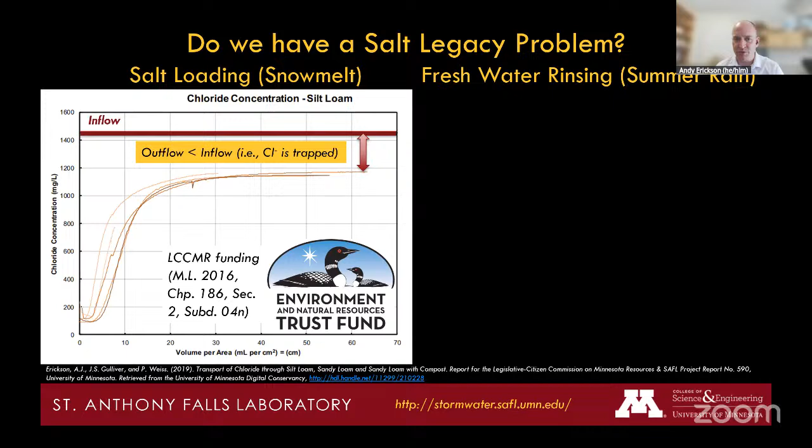What was interesting also is when we go to summer rain, this kind of freshwater rinsing, we don't see all the salt come out either. So these two plots are showing chloride concentrations over time or volume through the column experiments. And what was super interesting is when we loaded it, not all the chloride came out. When we put clean water through it, not all the chloride came out.

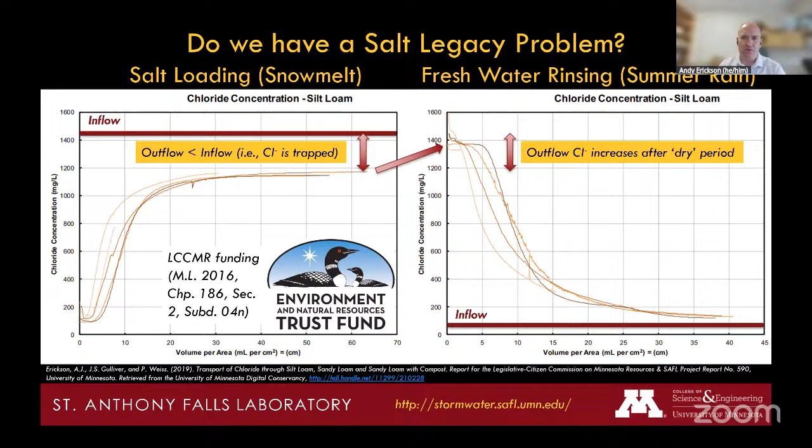So this chloride in the road salt is somehow interacting with the soils and not traveling 100% with the water, which has been the conventional wisdom and understanding of these processes for many years. But as I said, these are laboratory experiments, column experiments.

We also found the chloride is building up in our soils adjacent to real roadways out in the environment. We went out to a highway where we had really good salt application data for a number of years. We collected soil cores. We looked at that data in terms of depth and location, distance from the roadway, et cetera. Again, there's way more detail that you could see beyond this slide. The full report's linked here at the bottom, and I can provide links and even email attachments for all the resources that I'll share today, if you are interested.

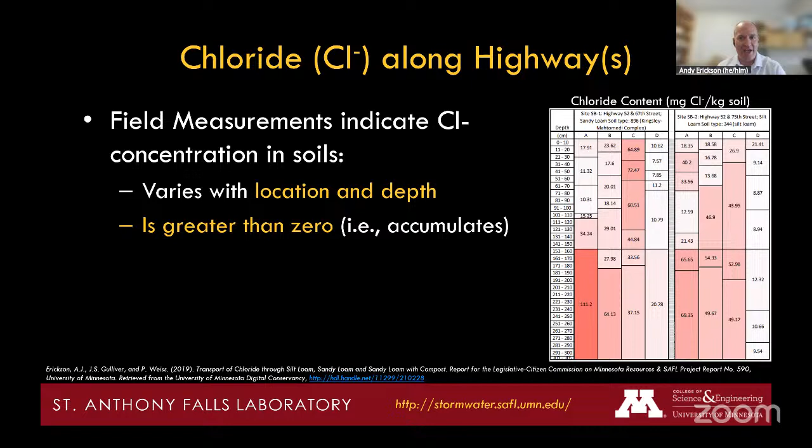But this plot is really just showing depth below the surface at 4 different distances away from the roadway at 2 different sites. And if it's more red, that means there's more chloride in the soil. So we did see variations of chloride concentration in the soil based on depth and distance from the roadway, but it was not zero. So the salt is accumulating in our roads. It is building up in those soils. And what that means long-term is that we have a legacy problem in the soils.

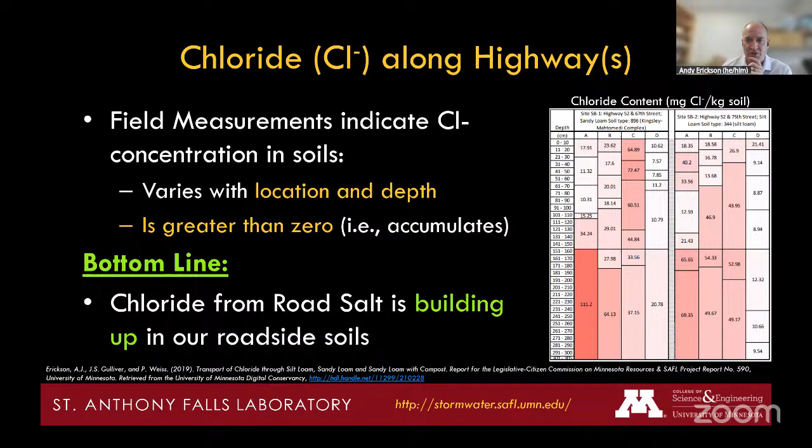In other words, if we were to stop using sodium chloride 100% today, never used it again on our roadways, there is still a buildup of salt from the decades of application that has gone on in the past. And it may take years or decades for all of that salt to wash out again. That's what our rinsing phase experiment showed, is that it takes a really, really long time, a lot of water, a lot of very clean water to really flush out all of that salt from the soil. And that means we have a salt legacy problem.

So what can we do to reduce the inputs to the soils? One question was permeable pavements. Permeable pavements are being used in stormwater management at the surface, not for chloride management, but for volume reduction and water quality. There's actually a number of benefits that you can see here on this slide: hydroplaning resistance, smoother riding surface, less spray, better visibility, noise reduction.

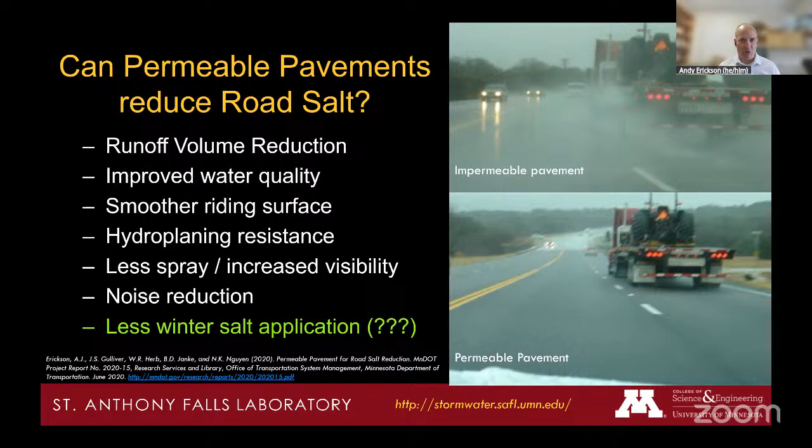The question we wanted to answer is, what about road salt? If we put down a permeable pavement, recognizing that that's a direct connection to groundwater, can we use that to reduce road salt or eliminate road salt applications? And what does that mean in the winter? What does that mean in cold climates? Are we going to have snow and ice and driving impacts by using permeable pavements? And so that's what we measured. 2 parts of this research. One was related to temperature.

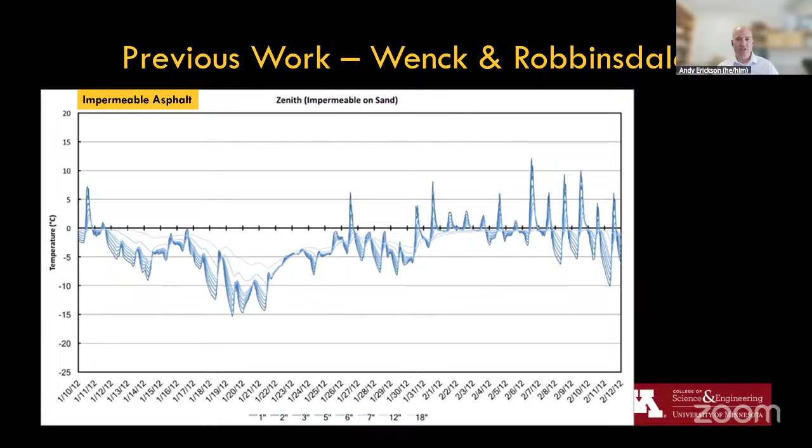This plot is actually temperature profiles into the soil below a pavement. It's going from the darkest color here at the bottom of these profiles, right near the surface of the pavement, to the lightest colors, very light blue that you can maybe barely see, at about 18 inches below the pavement surface. And these are different temperatures over the month of about January 10th to February 12th, in 2012. This is an impermeable asphalt residential street. But 1 block away is actually a permeable asphalt site, and we had temperature sensors there as well.

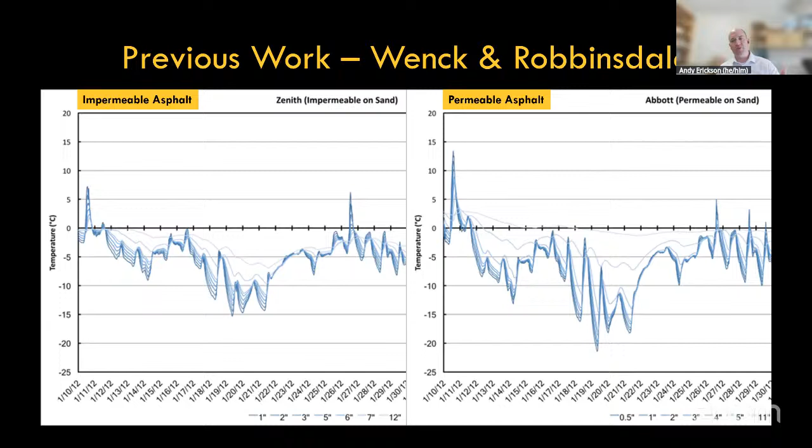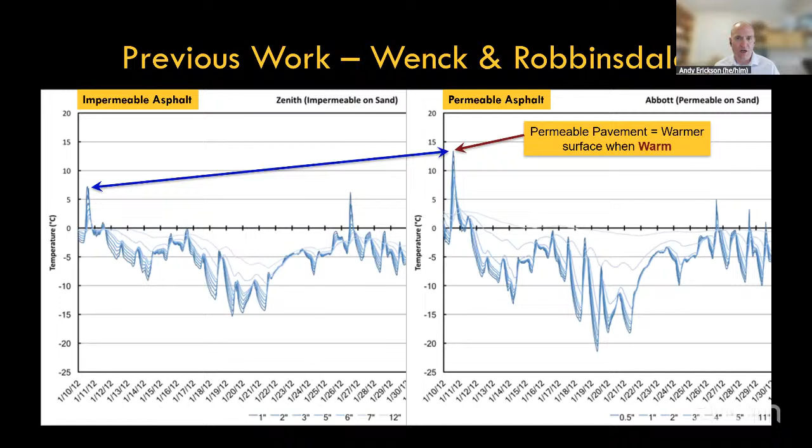And what's super interesting is when you compare these 2 trends, when it's warm outside in the winter, and it can be warm in the winter, we have snowmelt events in January and February, the permeable pavement a block away was actually warmer. It was roughly 5 degrees Celsius warmer on the permeable pavement at the surface when the air temperature was warm. But the opposite was also true. When it was cold out, the permeable pavement was actually colder.

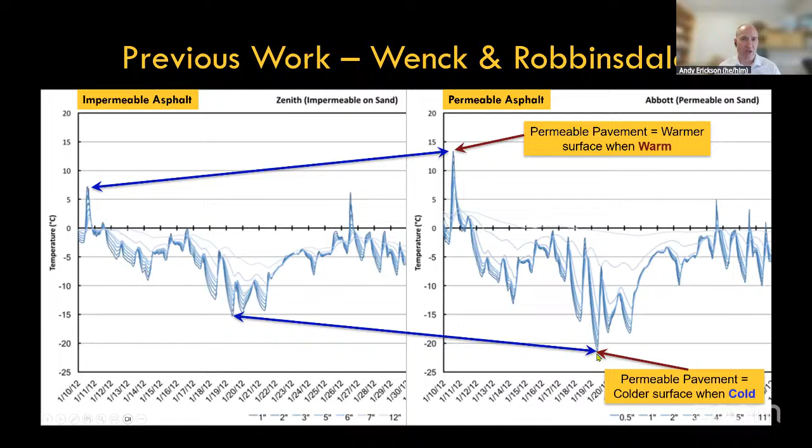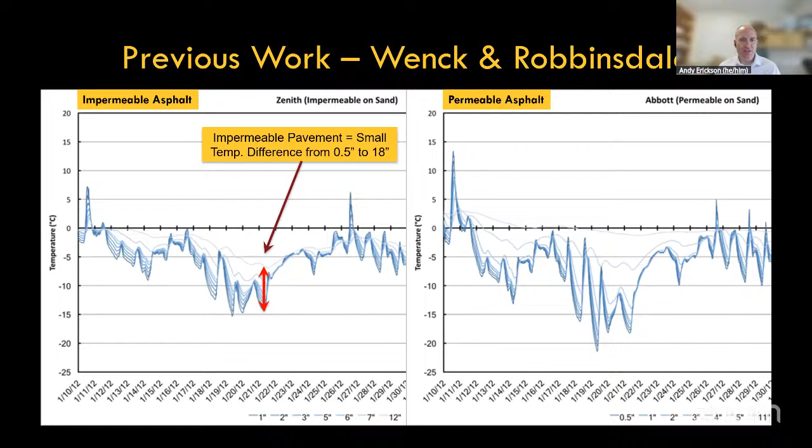So we didn't really expect this. We thought maybe the permeable pavement would convect air as well as moving water. If it goes down below the frost line, why can't the heat from below the frost line come up through the pavement? Not true. When it's really cold, the permeable pavement's colder. When it's warm, the permeable pavement is warmer. And what's also interesting is in just that 18 inches from the pavement surface into the subbase, there's a temperature difference as well. The permeable pavement had almost 15 degrees Celsius difference over that 18 inches, whereas the impermeable pavement only had about 5 degrees.

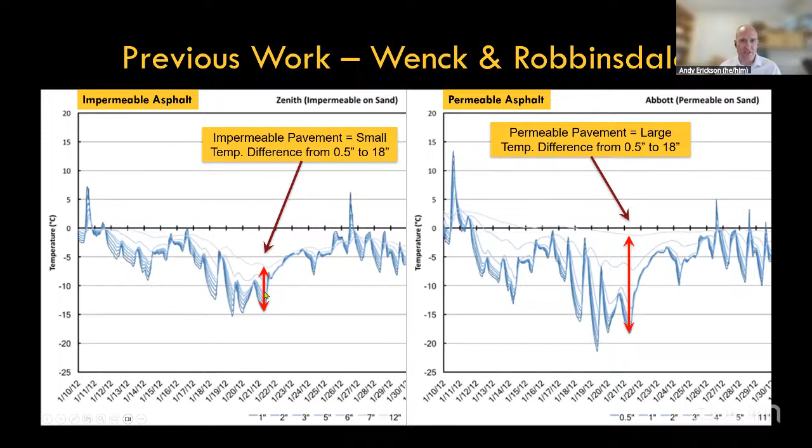So coupling this with what we just saw about warm and cold temperatures, the bottom line here is permeable pavements are actually insulating. They're just like insulation at the surface. So when it's cold out at the surface in the air, that heat below the frost line can't get to the surface. Permeable pavements actually prevent that heat transfer.

It's also the same thing at the top. If you have a nice sunny day in January, really warm outside, that heat can't penetrate through the permeable pavement. It gets trapped. So what it means, bottom line, is these permeable pavements can be beneficial in some cases, but in other cases, they're not.

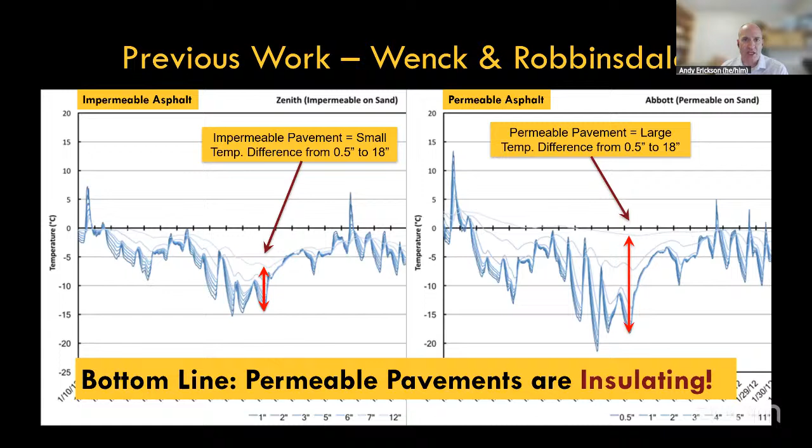We also measured friction. And so in addition to seeing thermal insulation, we saw that anytime it does melt at the surface, the water disappears. And we had sites where permeable pavement and impermeable pavement were right next to each other. And we can see pooling of meltwater on the impermeable pavement that then refreezes at night, causing an issue. Whereas on permeable pavement, it disappears.

Refreezing never happens on permeable pavement unless you don't maintain it. If you don't maintain your permeable pavements, you lose all of your benefits of having a permeable pavement. You can't just set it and forget it. You need to maintain, you need to make sure they're not getting clogged. You also need to make sure it's good permeable pavement.

Some of the early permeable pavement installations, especially in Minnesota, the contractors just didn't know what to do with this stuff. And so we had issues not only with clogging, but poor installation and failures, and it just didn't work. Today, contractors know how to do this. There's a lot of experience, there's a lot of good guidance for contractors. If you need to educate your contractors in your area on how to do permeable pavements in cold climates, please let me know. I can point you to resources, I can point you to training, I can point you to people that have a lot of experience on how to do this really well.

So there are benefits to permeable pavements, but when it's cold, it could be harder to get that snow and ice off that pavement. So what about other chemicals? What if we don't use sodium chloride at all? What if we look at potassium acetate or a formate or some other organic chemical to reduce our road salt, sodium chloride applications? Well, we did some experiments on this.

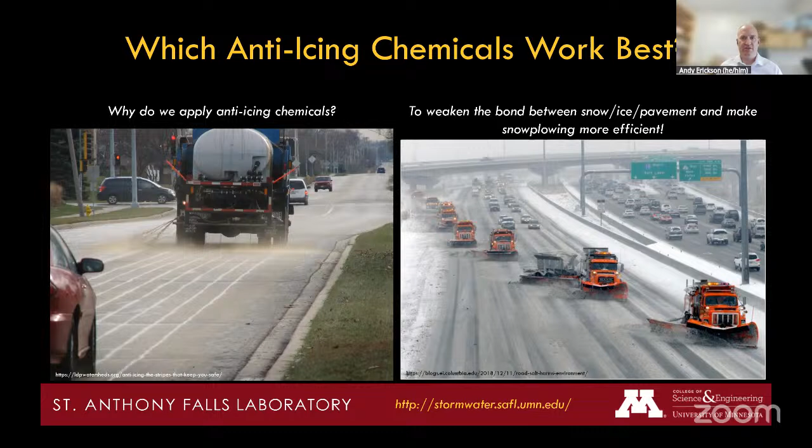We wanted to measure these different chemicals to see which ones work best at this process. And we did it at varying temperatures. Just like we do in Minnesota in the winter, we turned the thermostat way down. We started at about 23 degrees Fahrenheit. Everything worked really well.

And I recognize you can't see the data on the right side of this chart. You're not intended to be able to read it or see it. It's just giving you a visual that this data is available. It's in the reports, which again are linked here at the bottom. I'm happy to share this data if you want to dive deep into it.

But at 23 degrees Fahrenheit, which is below freezing, everything works. Sodium chloride works, magnesium chloride works, potassium acetate works. We actually used Rain-X, which is a hydrophobic substance. You can actually put Rain-X typically on your windows or on your car windshield so that the water beads off of it. The thought was, why wouldn't we want water to bead off of our roadways, right? Actually, that weakens the bond between snow and ice and the pavement as well.

But when we start turning the thermostat down, when we go down to about 5 degrees Fahrenheit, surprisingly, sodium chloride still worked pretty well. We think it's within the margin of error, but generally we say about 10 to 15 degrees Fahrenheit, sodium chloride doesn't work so well. But in our experiments, at least in terms of bonding strength and how strong the ice stuck to the pavement, it worked about as well as everything else.

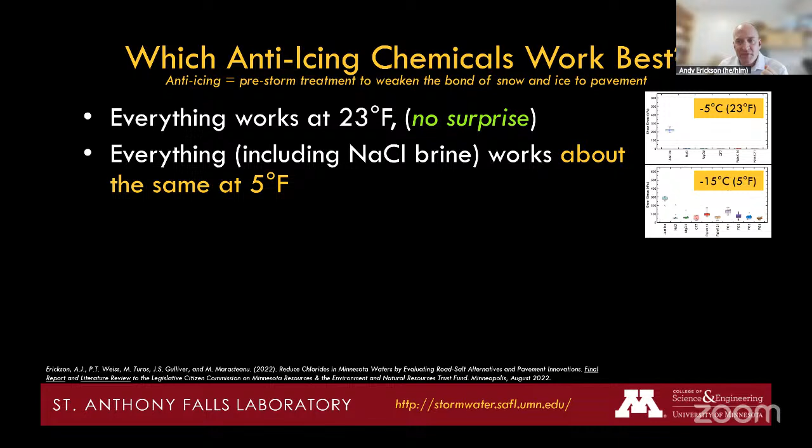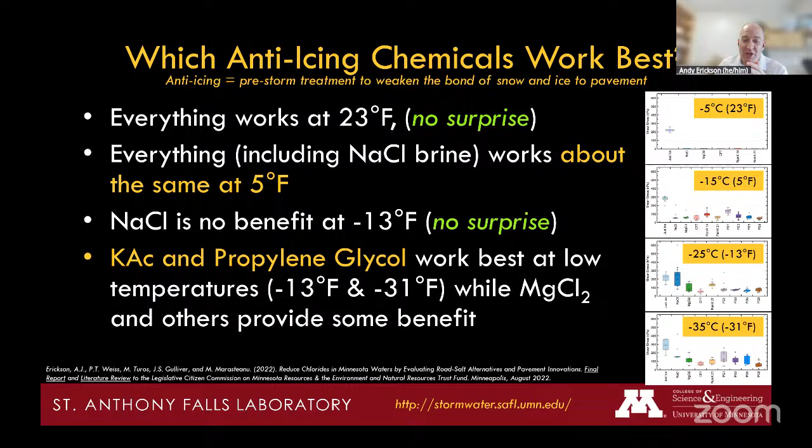But when we get to 13 degrees below 0 Fahrenheit, sodium chloride did not help. It didn't do anything. It was no different than just plain ice. But potassium acetate and propylene glycol worked very well. Magnesium chloride did provide some benefit, but as you get down to about 31 degrees below Fahrenheit, mag chloride starts losing its effectiveness as well.

So if we think about alternative chemicals and think about potassium acetate, propylene glycol, for anybody who doesn't know, that's what we put on our airplane wings when we de-ice airplane wings at airports. It's propylene glycol. Ethylene glycol is what we use for antifreeze in our cars. Ethylene glycol is highly toxic and hazardous. Propylene glycol is not so. It's not poisonous like ethylene glycol is, but it still has some environmental impacts.

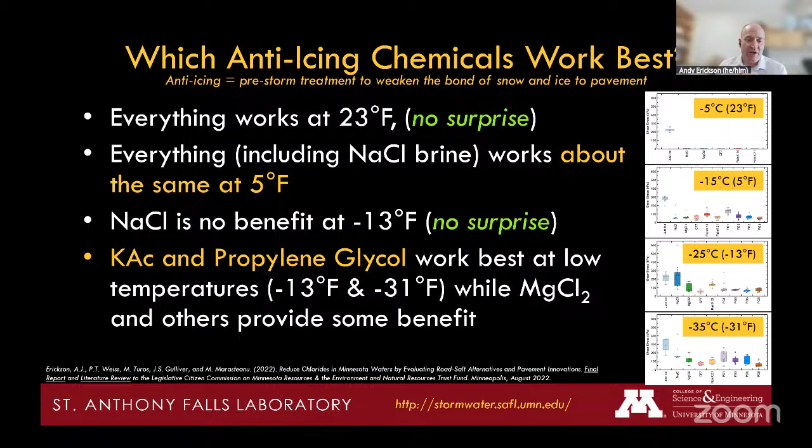So that was kind of our next question: what about environmental impacts? If we switch to a different chemical, do we trade a chloride problem for an acetate problem or a glycol problem? So we did a fair amount of research on this. We measured the toxicity. We actually focused, though, on potassium acetate. We had some very specific funding from our Department of Transportation, Minnesota DOT, to look at potassium acetate because they were piloting potassium acetate in Duluth, Minnesota. And they wanted to know what are the environmental impacts, what are the best uses of this material, things of that nature. So we focused on potassium acetate, but we have some data on others as well if you want to dive into the reports.

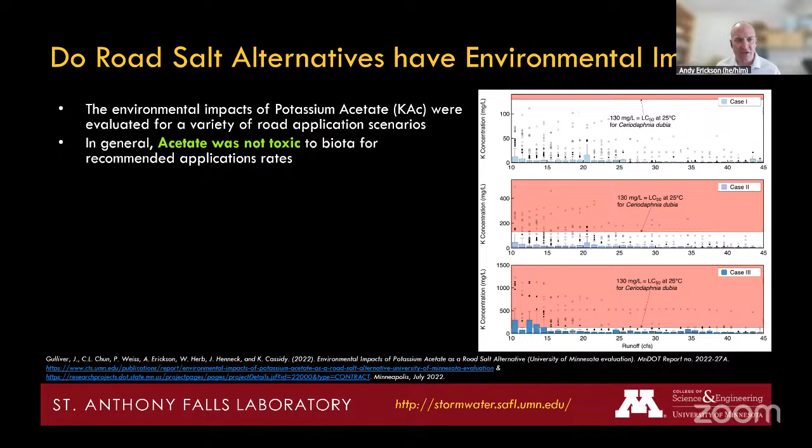However, it's not the toxicity that we expected. We were investigating acetate, but acetate was not the problem. This was a collaboration project with Iowa as well, and they actually developed a model to predict how acetate would move and degrade through the environment. And they showed that actually, under most winter and snowmelt conditions, the amount of acetate we would put down is not a negative biological impact on our environment. Potassium was actually what was exceeding our toxicity levels.

So that's where we need to focus our next efforts, thinking about what we can use for alternatives. Maybe not even the acetate or the propylene glycol, but something else in the formulation might be the toxic issue, and that's where we need to worry about it. And actually, we showed the potassium could be above toxic concentrations even when we apply it to 25% of the roadways. So generally, we recommend that we only put it down under the most precarious winter situations and driving safety locations. So only where you really have the biggest problems, and really probably on the coldest days.

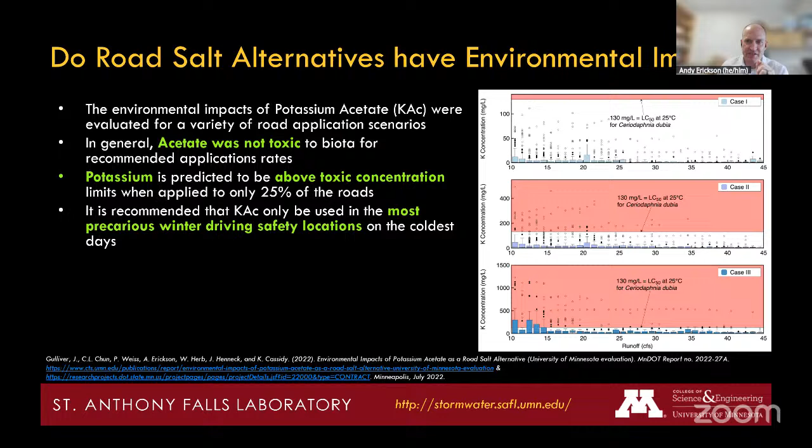Potassium acetate also works at very low temperatures, so that's one of the benefits of it. But we really don't want to be putting it on parking lots. We don't want to be putting it on other roadways and driveways because these areas are unregulated. Most of the applicators are untrained. They're highly susceptible to over-application. And we just don't want to exceed any of those toxicity limits.

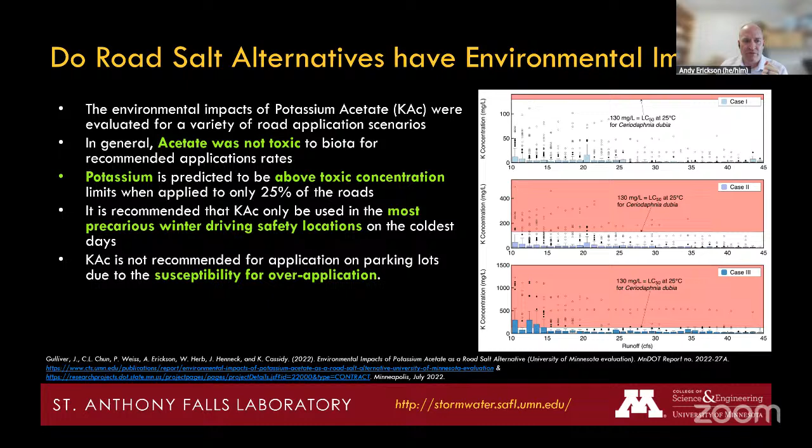We also need to think about the formulation here. And again, this is kind of getting into a quasi-chemistry lesson, but we need to think about something other than potassium, maybe a sodium or magnesium or some other cation that would not exceed our toxicity levels when we apply it at the rates that we typically need to apply it to keep our roads ice-free.

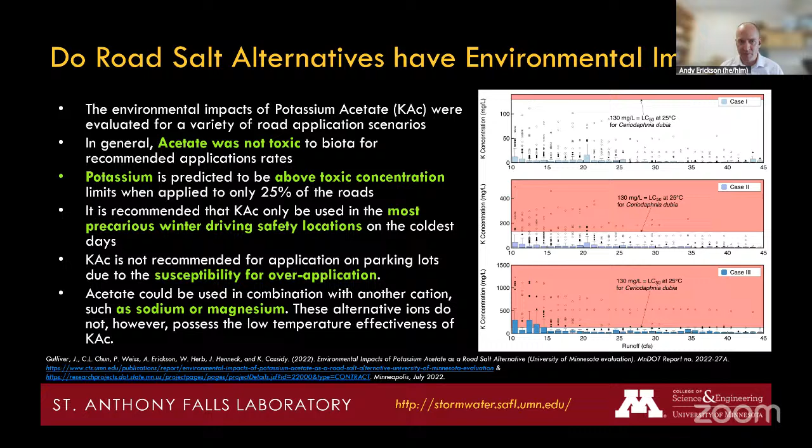But one of the big pushbacks on using alternative chemicals is the cost. And most people say, well, it's just way too expensive to switch to potassium acetate or switch to something else. And we did the math. And there's actually a financial case to be made for switching. And that's what I'm going to share now in the next couple slides. There is an economic incentive to going to alternatives.

So if we think about material cost first, because at the end of the day, that's the first thing anybody asks. Cost of road salt, again, these are ballpark numbers. And again, I can send you a resource here if you want to see how we got these numbers. But in general, cost of road salt, sodium chloride, this is rock salt, about $100 a ton. Okay, it's relatively cheap. But the vehicle corrosion, the road maintenance, the damage to trees, the damage to other infrastructure, bridges, concrete, etc. Pretty good estimates are out there to put that at about $3,000 per ton of sodium chloride applied. So the damage impacts are actually pretty considerable.

If you think about the ecosystem or the environmental impacts, and again, this is where it gets a little more nebulous, a little more subjective, although there has been some really good literature on this and people putting cost to the environmental impacts of road salt, both on groundwater and surface waters. That's actually almost $10,000 per ton. So when you add these up, we're almost $13,000 per ton of road salt.

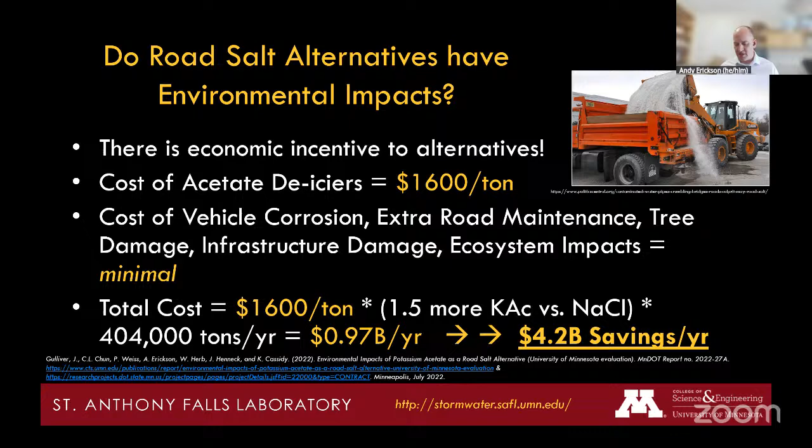However, I also understand and acknowledge the argument that keeping our roads safe, keeping them ice-free and snow-free in the winter is very important. It's human health and safety and public safety. I get it. So it can be a very challenging argument to make, even if you have the numbers behind you. But I feel like there is a burden of evidence here that we can move from sodium chloride to others. But what about other things?

What if we don't want to do chemicals at all, right? We've all heard in the news about chemicals that we've made in the past that we thought were the next greatest thing. And sure, they were great and they served a wonderful purpose. And now we're finding forever chemicals are a problem in the environment and in our human bodies. So maybe we don't want to trade one problem for another.

So I always think about abrasives. Ultimately, at the end of the day, we need friction on our roadways to be safe. We need our vehicles to be able to stop and maintain control in the winter. And in places like Scandinavia, Norway and Sweden, Denmark, they have other ways of keeping their roadways safe without using sodium chloride. They're using abrasives. In some places, they'll use chains on their tires or studded tires, but other techniques.

They also have a different expectation in those cultures that, you know what, it's winter. There's snow and ice everywhere. Maybe we don't need to be driving at freeway speeds in the middle of the winter in a cold climate. So some of it's a little perception and expectations, but also there are alternatives to using chemicals.

Some of the pushback to using things like abrasives, sand or grit, is it doesn't work as well. It bounces off the road or it gets blown off the road. Some have argued it's more expensive than salt. I don't know if that's true or not. Even considering maintenance, I recognize if we put sand down on our roadways, it's going to fill up in our catch basins and in our stormwater pipes and our stormwater BMPs. But guess what? That's what our stormwater infrastructure is for.

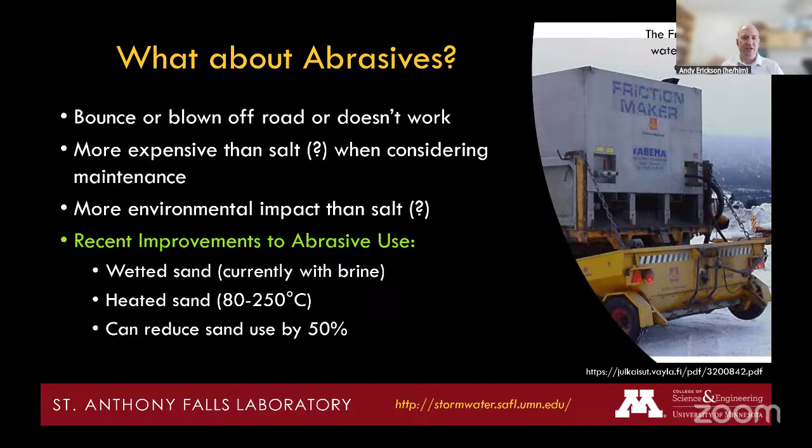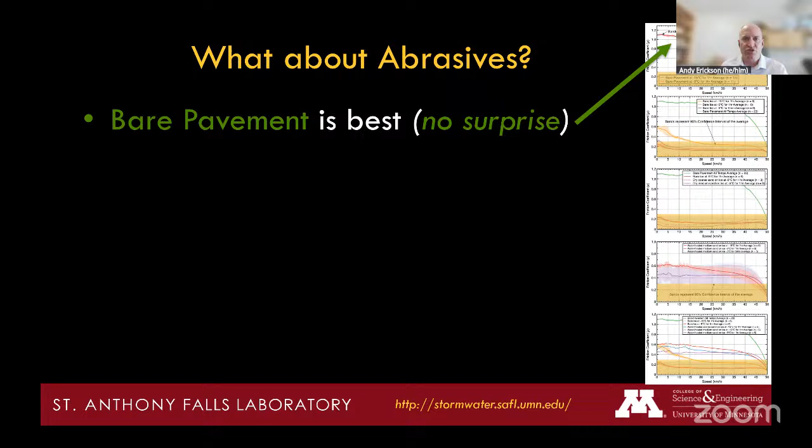What we learned: bare pavement obviously has the best friction. If you have a bare pavement, you're going to get the best friction. That's why many of our DOTs want bare pavement. That is their striving goal. But that's no surprise. We all know that. Bare ice is not safe. If you have just ice on the roadway, it's going to be slippery. You have a very low friction, or what we measured was friction coefficient. Again, no surprise. That's very obvious.

As researchers, as academics, it's really nice when the data supports reality and what we all kind of know as common sense. But it gives validity. It shows that what we're measuring is representing what we all know to be true. So then when we go to things that we don't know and we're trying to answer research questions, we have confidence that the data is supporting the conclusions we make from that data. So the next thing, I don't know if many people in the audience remember this or have experienced this, but in many places, a number of years ago, we did it here in Minnesota.

We used to put sand down, dry sand was put down on the roadways as an abrasive in the winter to help with traction. And again, many people said it didn't work. We had to put so much sand down because so much would just blow off the road or get sprayed up on the cars. It would chip the cars. It would fill up and plug all our stormwater pipes.

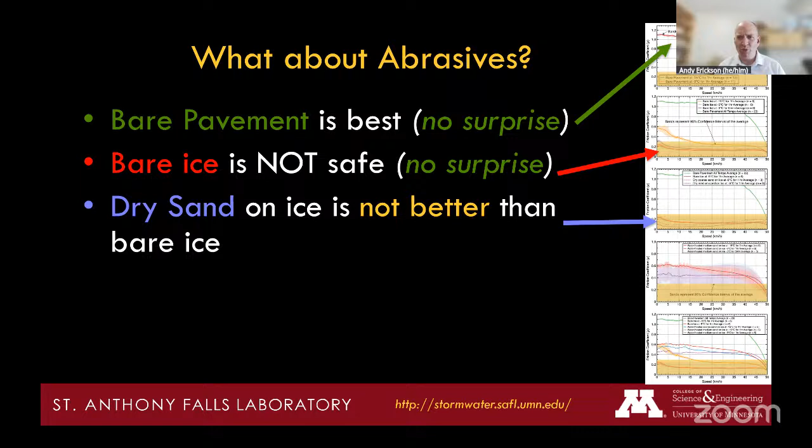Well, our research showed that actually, if you put down dry sand on top of ice, it's actually no better than just having the ice. You actually put the sand down for no reason at all. It did not improve friction. It did not help. And in fact, depending on the particle size of the sand, it actually made it worse. It almost was like marbles on ice, which is not a Disney show, but could be quite comical if it was.

So then we looked at this technique that's been used in Scandinavia and other parts of Europe, Switzerland, for example, water heated sand. And the concept here is you take sand, you put it in a truck, and you actually put it in boiling water, essentially boiling water or water that's close to the boiling temperature, so that the sand picks up all that radiant heat. And then you don't put the water down, you just separate the sand and you put this sand down. That's really kind of at boiling temperature.

When it hits the ice, it actually melts into the ice a little bit and then refreezes. It turns that sheet of ice really effectively into sandpaper. And it works really, really well for increasing friction. It doesn't quite get the friction that you would get with bare pavement. I mean, no surprise, it's still ice with some sand stuck to it. But it's way better than dry sand. It's way better than bare ice. And it has way less environmental impacts than sodium chloride or even any of these other alternative chemicals. So water heated sand can work.

I acknowledge the cost to implement this here in the US is not insurmountable, and yet it's not easy. We have been working to try to get a pilot study down here, to get a truck over here, demonstrate that it works here in the US really well, to get cities to believe in the concept and get a city's perspective on what it was like to implement this. We're still working on that.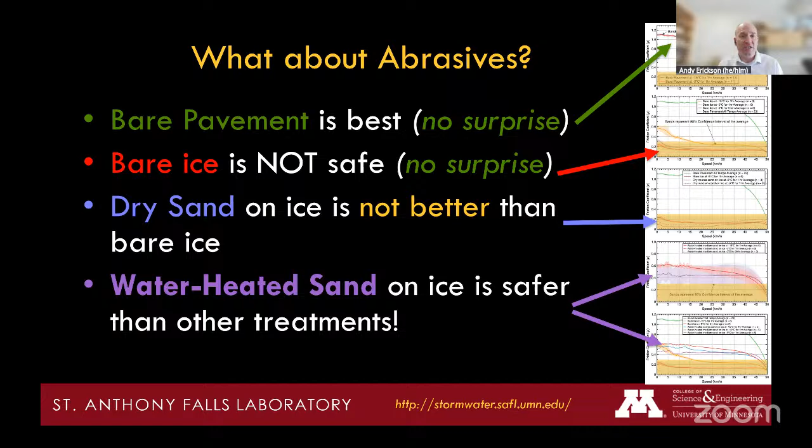If you are super excited about this concept and you would like to partner with us to become a pilot city to try it, I'd love to talk to you. Reach out to me afterwards. We'll continue that conversation. We've been pursuing funding to do this for a number of years and really just run up to the roadblock that many of the cities are just not ready or don't have capacity to try something like this yet. If you are, or you're at least interested in finding out, let's talk about it and see where we can go with it.

So summarizing 5 things we learned about road salt over the last many years, actually close to 2 decades now of road salt research here at the University of Minnesota alone. Do we have a salt legacy problem? Yes, we do. It is built up already in our soils near our roadways and in our soils feeding our groundwater wells. So we have a legacy problem.

For those of you that might be policymakers, if we outlaw salt today, in 2 years, we're not going to see the benefits of that change. We might not see it in 10 years. We have literally decades of salt built up in the soil. So we should expect a fairly long time before we start seeing the benefits. But that means the sooner we start, the sooner we're going to start to see the impacts.

Okay. And if you're in the policy realm, we can't have a policy that implements today and then gets changed 2 years from now or 4 years from now. We have to have the expectation that this is going to take a while to see the benefits of our efforts. So we have a salt legacy problem.

Permeable pavements is one solution. We can implement permeable pavements. They're not ready for the highways yet. They're not ready for the high volume, high load roadways. They're really good for residential streets. They're really good for parking lots. They're really good for driveways, walkways, things like that. They work really, really well.